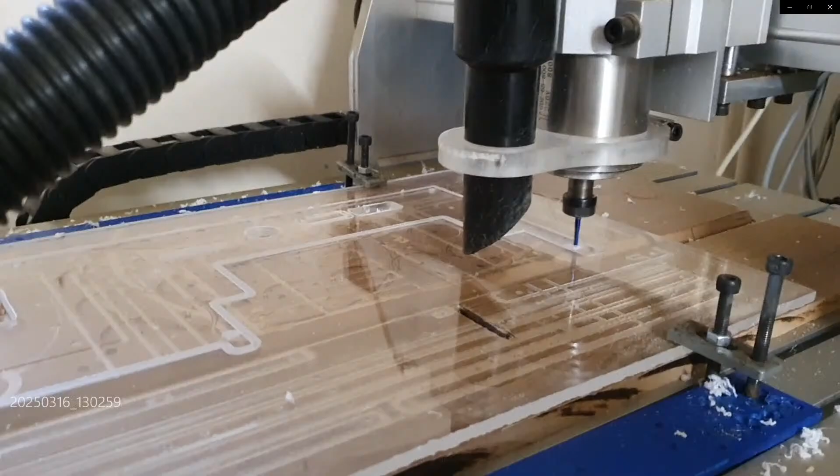Right, I put myself on. So we've got, this is milling out one of the panels. Hope you can hear me over the noise. Maybe you can't, maybe you can. Maybe it's echoing, I don't know. Tell you what, I'll turn down the audio from the display capture if I could do it, but I don't know how to do it. Desktop audio, right, let's turn that off, right, let's mute that.

Not sure it is muting it actually. No, it's not muting it because it's coming out the speaker. So I could mute it on here. Tell you what, let's mute it there. Has that muted it? Maybe, maybe it's still too low. Let's go a bit further.

Yeah, hello, right, anyway, so this thing, I got the plastic already reclaimed, 6mm acrylic, cast acrylic it is. I bought the new milling bits, which is that there, pack of 10. They're supposed to not stick to it. They're still sticking to it.

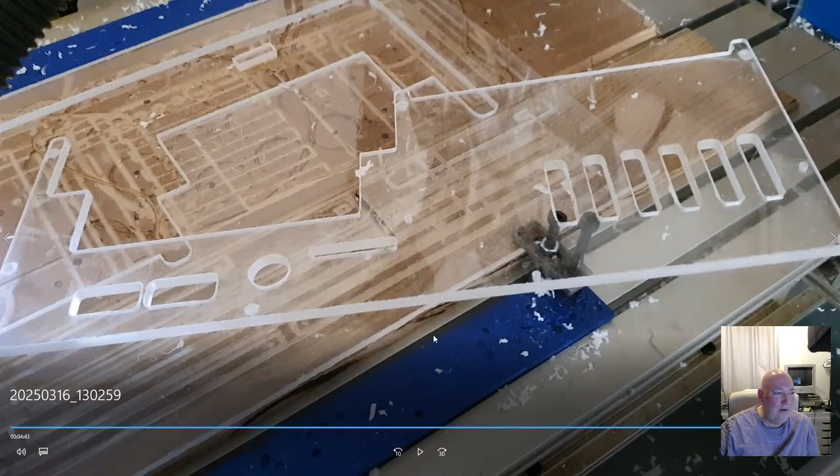Now I have to go around and trim that up, but as you're trimming them, whatever tool you use, you could scratch the surface. So that's one, that's that gone. All right, let's find the next one. Alright, next one.

This is milling out the pockets. They're in the wrong order, these are. So you can see the tip full up of melted plastic. You can't get it off. You have to crack it to get it off, you have to squeeze it. It hardens up quickly. So that's done the pockets on the trim.

Is this the next one? Oh, looks like the same one. Why is that the same one? Anyway, it didn't mill it all the way through. Let's go to the next one. Oh, what is it doing now?

Oh, it's cutting it out. Yeah, sorry, this is the front grille, the air intake. It's milling out going around the outside, an outside cut basically, but look at the state of all this. Look at it, see, it's all hard plastic. It's melted and left it like that.

Now I have to trim that. You can go around it with a blade or something like a wallpaper scraper. And no matter what, you can spend hours trying to do it without scratching it, but you're going to scratch the surface. I've scratched it.

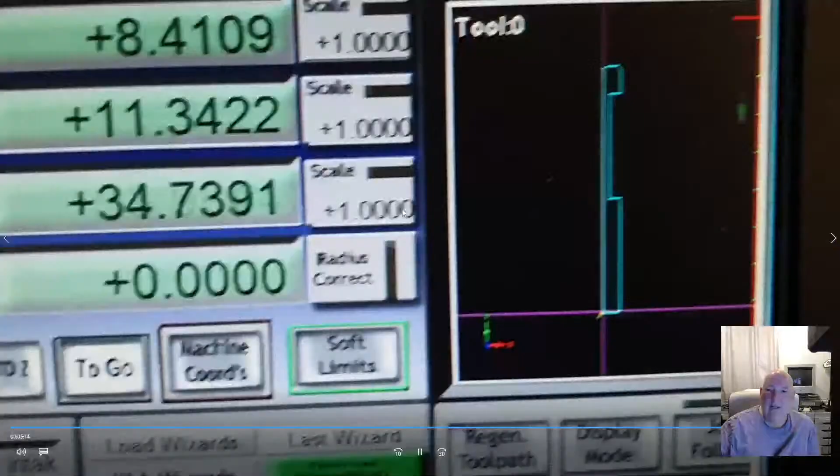It's got a build-up of plastic on the tip, which is not good because, and see, it's almost solid. I think I stopped the thing turning it. That's just a view of that, end of the G code, and it's clogged up.

So I thought if I buy the right milling bit, it would do a better job. It's stuck in because my table's not flat, it's on a bit of wood. It's not flat, the spoil board's not accurate. Yeah, I didn't, it was okay this side, but not the other.

What else we got? Let's have a look. I'll just show you these. Right, this is, don't know what this is. Oh, this is doing the slots. The panel that contains the card slot guides.

It's doing some weird stuff. The G code's doing its thing, and it's done that little bit. It's already stuck on. And it's pocketing out the V. Later on, it'll cut across there and get rid of that rounded bit.

That's its tool path. This would do a better job in aluminium, but it would take longer to cut out. But you'd end up with fine shavings instead of this.

This thing is flinging these pieces out everywhere. They're hitting me, burning my hands. I've got my protective goggles on to stop them going in my eye, but it's chucking them out everywhere. The only reason it chucks it out is when it builds up to such a width, it flings it off. Look, it's just milling with a clogged up bit.

Let's speed it up a bit more. Yeah, it's more of the same, just cutting it out till it finishes. I don't think it's finished there.

That's finished, so I move it out of the way and switch off the inverter that drives the spindle to variable speed. See that brand new bit, all stuck up.

It was a real ball. Look at the mess - you have to hoover all that up, and it's a ball ache just cutting the plastic into these 600 by 400 millimeter, well 300 mil panels, to go on the table.

But there's a finished thing, sort of - the idea is there. But you know, look at all the stuff that's built up on it, I've got to cut that down. The holes turned into a bit of a mess - all the holes swirled round with the stuff that's stuck to the milling bit and melted it.

Right, what else have we got? Oh, this is cutting out some of the... what is it cutting out? I don't know, can't remember now.

Speed it up a bit. Oh, what are these? Oh no, this is doing the front panel - this is doing the floppy bay. This is the double floppy bay on the front panel, and the CD tray and everything.

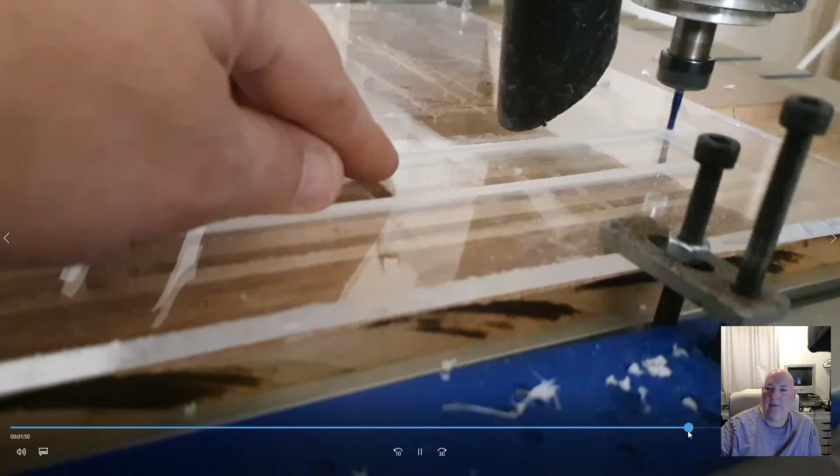Yeah, it's loose now. It's going to cut a bit more G-code because it doesn't know it's cut through it. So I've got to try and move out of the way before it jams my bit. If that gets trapped between the milling bit and the rest of the plastic, it'll break the milling bit off, snap it off. So I have to get it out of the way quick.

So I think that's the end of that, and it's about to go and start the other one, but I've stopped it there because I'm cleaning up the edge. Right, I've cleaned the tip up now, so let it carry on.

I put a feed hole on it, and it starts off nice till it builds up with plastic, it gets worse and worse. I've tried altering the speed. I haven't tried it very low speed because I'm worried about it digging in and snapping it off.

But this cast acrylic melts at such a low temperature. Now I've milled polycarbonate before, and I'll be able to tap it and all sorts. But this was free basically, it was given to me, and I've got a lot of it. But it reacts well to laser cutting, so I think that's the way to go with this particular material.

Every time it goes around, this stuff is building up on the edge and melting into the plastic, so they've got even more work to tidy it up. But anyway, there's a problem here, because I'll show you in a minute, but that is in the wrong place - that piece is in the wrong place, that cutout. Let's just go a bit faster.

There's a bit of aluminium there, because I've milled out aluminium on some of my old videos. Right, next one - this is the last one. No, it's not, that's something else. Not me in my underpants though.

So let's show you the actual thing then. Unfortunately I haven't had a shave, so never mind. What have we got? Let me show you this bit.

And if you look closely, it's horrible - it's all scratched. Hang on, can you see it? Can't see it. It's basically, one side will be fine, you have to trim it with a knife. It's all milky and horrible.

Yes, you can put a hot flame on it and bring it back a bit - might be worth a try, might make it worse. Anyway, it's just turned out horrible, I don't think it does it justice. See all the scratches up here, where I'm trying to get this stuff down. Anyway, it'll be alright for a prototype, just to see what it's like.

So then there was these things, the spacers - milled out the spacers. I haven't touched these, haven't cleaned these up. There's a burr on them, can you see the burr? Horrible burr. Anyway, there's bits sticking out, bits of this stuff. It's so hard I can't get it off - I've just got it off then.

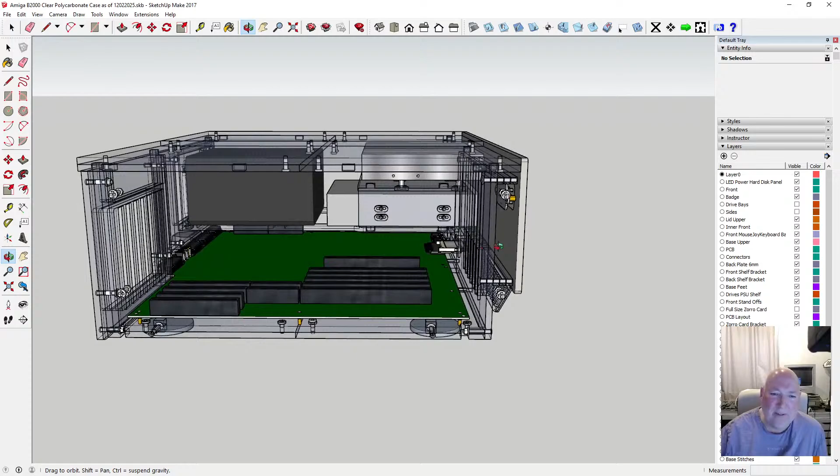I don't want to go and spend a couple of thousand pounds on a bigger machine that can cut this out in one piece. It'd be nice to do it that way, but the problem is having the space for anything bigger - I haven't even got the space for the ones I've got, never mind anything bigger.

So, to that end, with some of this stuff - now the main problem is this bit here. That seems to want to be in one piece, doesn't it? If I remove the front cover...

Let's remove the lid a minute, get rid of the lid, right? And let's get rid of the drive assembly if I can find it. Where are they? Can't see it... yeah, move that.

So if you look at the plastics, we've already got these pieces - hang on, it's probably best to go into this mode to have a look at it. So these three pieces are separate pieces, right, and then you've got this piece. So those four pieces can be made on the K40.

Probably using the K40 Whisperer software - I'll talk about that in a minute. So this rear panel...

It's basically - you could make it in two, couldn't you? You could make it in two. So we'd have to have an extra fixing. We've got four fixings anyway, so we could probably move one over a bit and split this into half.

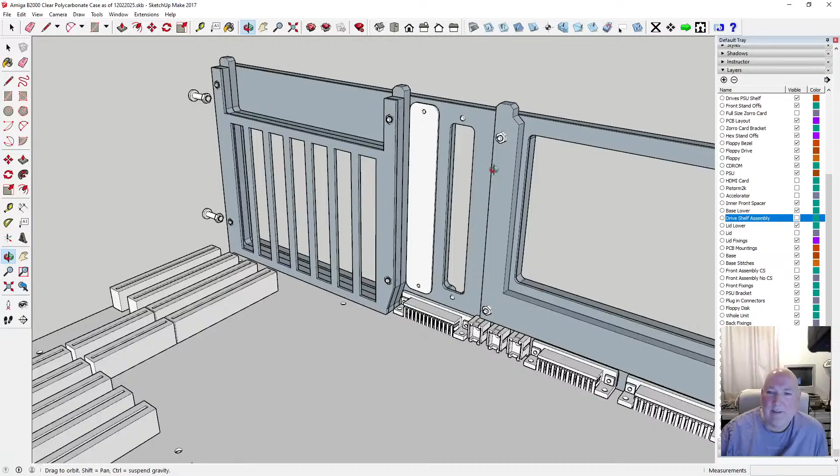This back panel - somehow split it into half. Now where we do that, I don't know. And with a bit of ingenious design on the back plate here, ideally we could extend this bit or do something where it sandwiches the two pieces of the back plate together.

So as you bolt it through, you'll have to have more fixings - that's the only thing. But that acts in two ways: it's a shelf and a bracing plate to brace the back two together to stop it shearing. So that could take care of that, pretty easily.

Now let's have a look at the base plates. Now the base plates, they're already in 4 sections, so we'd have to devise a method for that. It's in 4 sections partly to give you strength - a laminated effect of strength. Let's go back to this other mode for this.

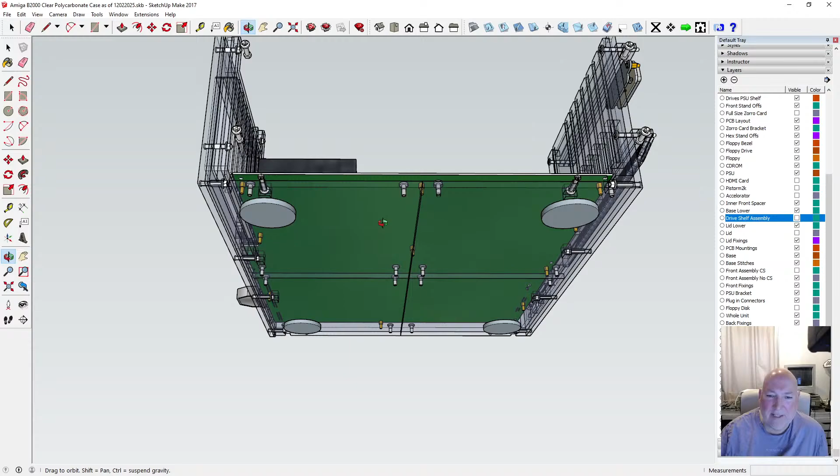So one laps over the other, so when they're bound together it gives you some strength. It's automatically like a bracing action in itself anyway, and it gives a bit of weight to it as well.

So yeah, it's a waste of plastic, and plastic is dear. Really, they just had it for free and I got lots of it. But if you had to buy it again, a sheet, you're looking at very expensive, just to buy the materials - never mind to make anything.

So anyway, I would have to somehow make this - they'd have to be made like that and bind them together somehow. Now, if they're going to be laser cut, it's not easy to do pocketing, so you either cut it all the way through.

I went on ChatGPT and asked, can you laser cut, can you pocket with a laser cutter? It says you can, but you have to alter the power level so you don't cut all the way through. But then you've got multiple passes - it's such a thin beam, 0.1 or 0.2 of a millimeter, you'd have to do so many cuts backward and forward just to get a pocket, and it might leave bits, might not come out flat. Like milling it, you can go along with a fly mill and cut it flat.

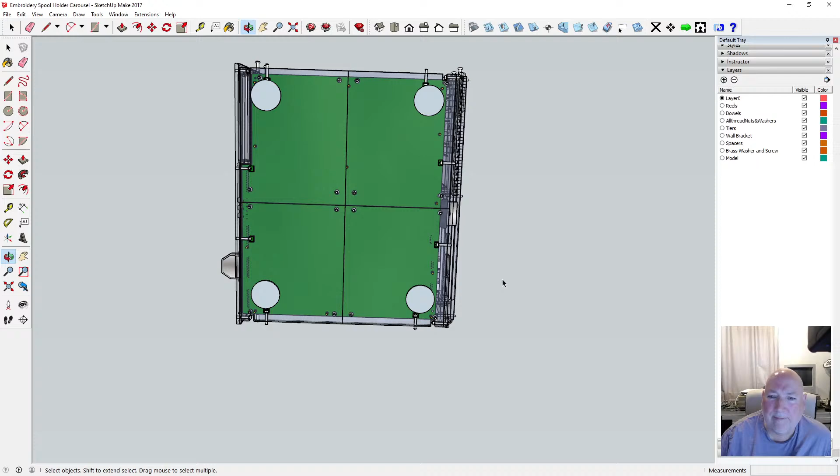Anyway, so we're gonna have to design something. Let me bring up an old design. I was constrained size-wise, not by what could be milled, but by what material I'd got to use - I had narrow strips of material. So let me just find it here... oh, hang on, there it is. I don't know if this is the latest one, but yeah, I made this. This is probably one of the old designs, is it? No, it is the new one.

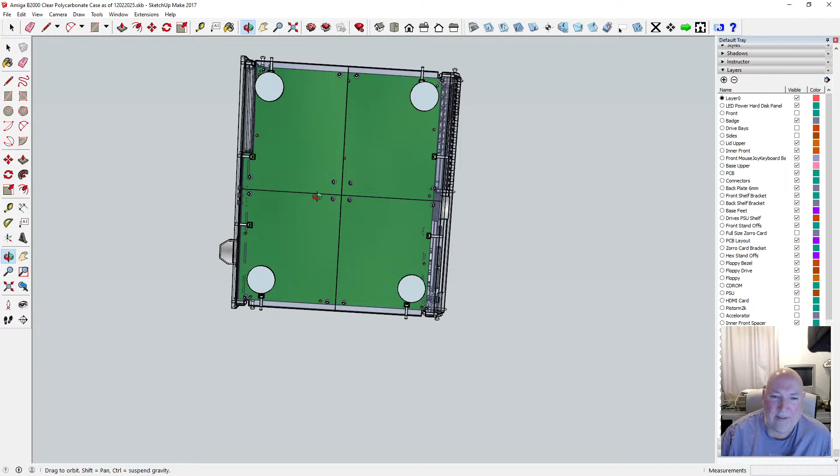So anyway, you can do stuff with it. Now for instance, I'd have to join up - so if I milled out squares, or laser cut squares like this size, for instance, then we could have a square around here that you stitched it together with. But then it's going to look a bit horrible.

Let's hide the PCB a minute. Right, so obviously at the minute we've got two layers - one running that way, and the other two running down that way, and they're bound together with these stitches. They're square, so it doesn't look a problem there.

What I've got to try and work out is how to do it - how to stitch four of them together. So you could put a square in and it could sit under the PCB, then you'd have to have bigger pillars. It's too much compromise, isn't it? It's too much compromise.

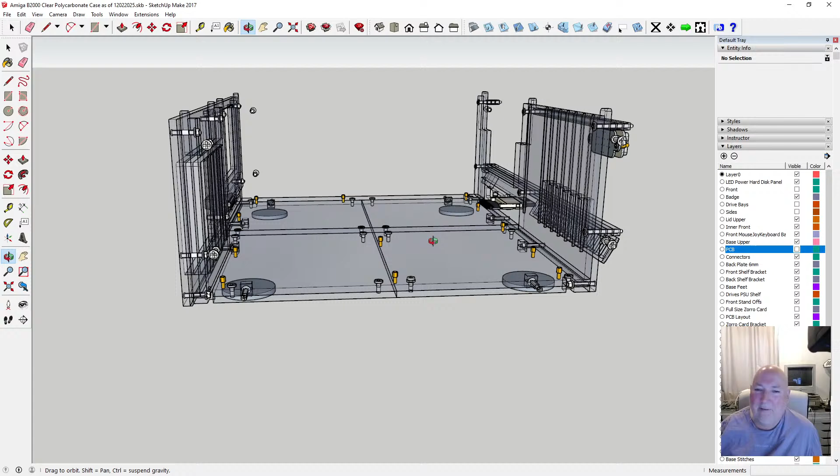So unless... yeah, the funny thing is I never had so much trouble with these when I was using the wrong milling bit. I bought the right one and it's worse. I don't understand it, yeah, it wasn't too bad - I had better results with the wrong bit. So I don't know, it's a weird one. But some people say you've got to get water in a squirty bottle, put it in the fridge, and keep cooling the plastic down. Even put the plastics in a freezer, bring them out cold, so it stops them getting hot enough, so it cuts instead of melts. Don't know, anyway, that's a lot of aggro.

So I think everything's got its pros and cons. The pros are with laser, you haven't got to touch it, and there's no chance of the milling bit hitting it and messing your work up. The cons are you can't do pockets easily, probably, and you've got to somehow, with a smaller size, stitch it up. Anyway, leave the base out of it - whatever we do with the base, we've got to do with the lid as well, so the same thing will happen to the lid.

Now I was thinking, on the top you could stitch it with a round plate, couldn't you, and sit your monitor on a round thing - no, silly idea, but yeah, a bit like a platter. Or you could put the round piece or the stitching bit underneath. But what you don't want to do really is... what you need to do is overlap it. I don't know, unless we do a crossbow type of thing - so you lay the first lot of plastics down, and then we make a strip, mill out a strip that goes across them two. So basically, yeah, you need to tie that up.

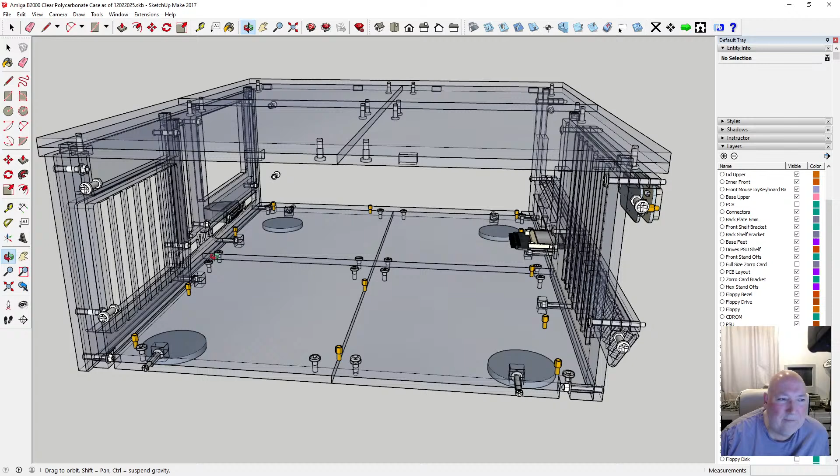So these would be, you'd have to create a flat panel that goes to there, but then you still got to stitch it up in the middle. So you'd have to start off, you'd have to almost do something like this, have a piece you can cut out there like that.

Then you'd have to probably have another bit here like that, and another one over here like that. And then you'd probably have to do another one here like that, and so forth, similar to that. So you'd bolt this, use the same stitches to bolt it together.

And your PCB, obviously might have to use bigger standoffs, maybe, unless your standoffs were on top of these. Yeah, so anyway, we're just running ideas through it, so there might be a way of doing it where it doesn't look too bad.

Or if you're going to stitch them together, so you'd use them and you'd get rid of the extra piece. You'd use a bit less plastic, or we make some aluminium pieces, mill out some aluminium pieces.

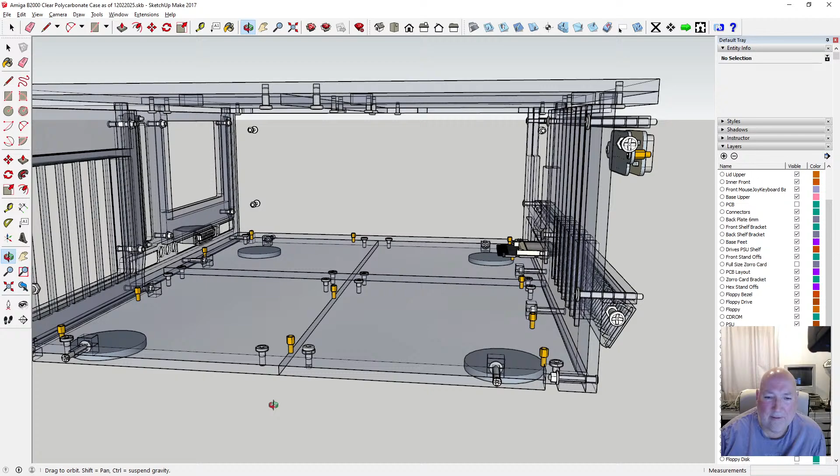Let's go back a few steps, clear that up. Right, so the same thing can be applied to the lid. Okay, now let's take the lid off a minute. Let's have a look at the front now.

So this bit can be done the same way. We could do some of that, we could put an intermediate bit or something here. These turned out too small as well, these did. By the time it was milled, it was just too small. They need to be bigger, really, if we go down that route.

Unless it's too fiddly - maybe it's better to do it a different way, make this in one, fill it out. I don't know. It's one thing designing it, it's another thing actually building it. So anyway, this piece could be cut there in the middle, so that can be made in two parts.

Almost, you almost want it like a zigzag, you want an overlap, but like I say, you can't overlap easily. So to that end, how do we join the two pieces? We'll have to work out how we're going to somehow - it needs to plug together somehow.

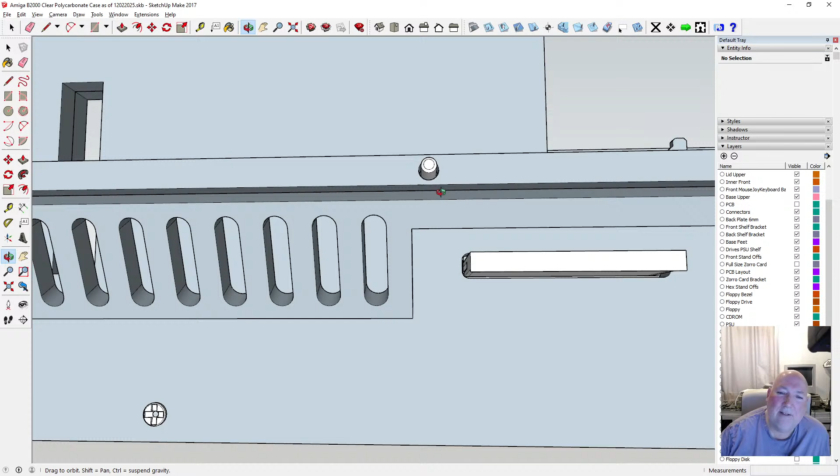Unless you could do it like a jigsaw, I suppose. You could put like a mortise and tenon joint, or a jigsaw, and then you just superglue it, but then it would look horrible. Yeah, so we've got to work that out.

Right, so that's one little bit of trim, but then we've got to work out also. So on the front, we've got this - there's no, actually these both pieces are in one piece, aren't they? But it wouldn't take much to... hang on, I've lost it now. Where's it gone? The back panel's on.

So that could be one piece, and this could be another. But then you've got to join them together somehow. So you could join it from this side, perhaps.

Well, because I've got two the same here almost, you could have one - now they occupy the same space, aren't they? Yeah. So they're held with that pin together there. Right, they're held with that pin. I'll do it from this one. So they're held with a pin together.

So these cross members could... oh, we have to cut them in bits as well. So it's a bit of an awkward one, how we do it.

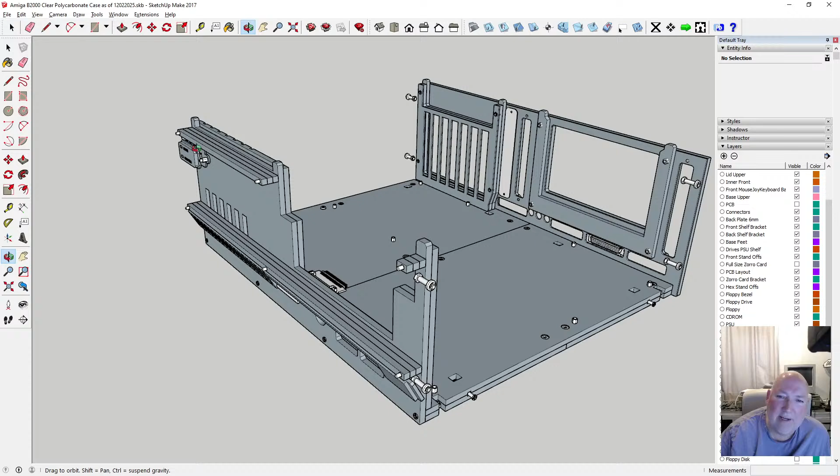So I want to keep the design together like this. As soon as you save one design and leave it and go to another, it's almost unusable, because the first one will be unusable. Because any additions or changes you make to the new one, you've got to go then apply it to the old one, or if you don't, it'll be out of sync. And really, you'll never touch that one again anyway, so you might as well get rid of it or modify the new one.

But I do want to design this out of aluminium as well, to make a new one out of thin aluminium, very thin aluminium. I found a piece of aluminium today at our works, and I took a picture of the label, and it'd probably be okay. It's still got that there, look. It's not the motherboard, is it? That's alright, okay.

That's the compact flash. So basically cutting it apart is not the problem, it's putting it back together. So making the separate parts, somehow you've got to stitch it, and it's got to be strong enough to be able to be moved around.

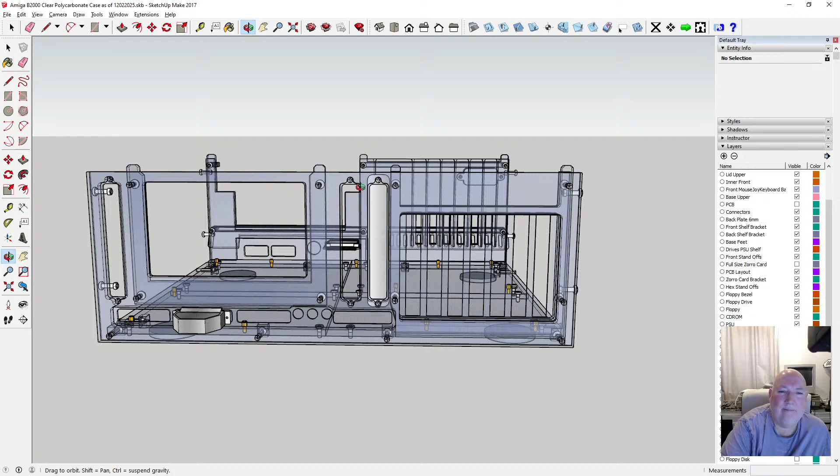It's just a shame that it's so big. You know, if you did a smaller computer it would be much easier, but if it was half the size. It's sort of damned if you do, damned if you don't. Stuck.

I suppose, what about 3D printing the whole thing out? Use a lot of plastic, wouldn't it? But 3D print each section. I've got a 3D printer, I've never set it up, it's just a cheap one. So you'd use a lot of PLA, but you wouldn't have the mess - it'd just take you literally hours to do the business.

I just want to, how am I going to do it, I wonder. Design in sections, or lay out money for a bigger CNC laser. The problem is, we want other people to be able to make it, so not everyone's got a big laser, not everyone's got a laser at all. So, I don't know.

See, you can make certain parts - these three here you can make. Because we're going to build this up out of bits like this, stitched together, that was the whole idea. So I'm just trying to work out if there's an ingenious way of doing it.

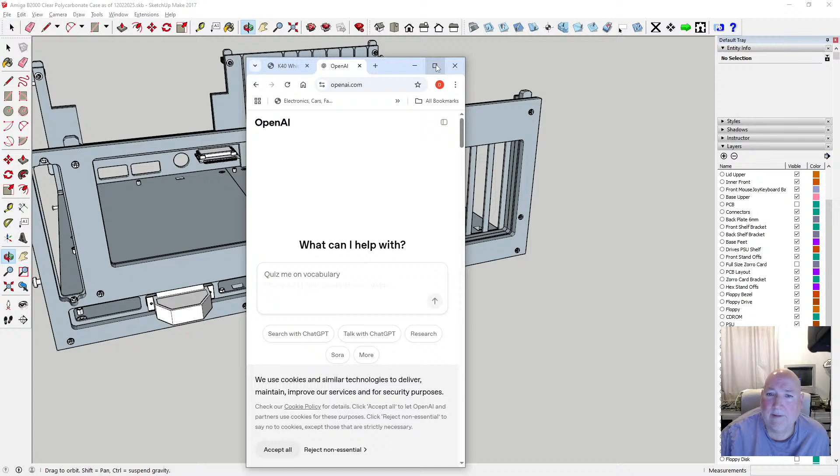I have a SketchUp model of an Amiga 2000 case. I use SketchUp's PhlatScript to generate the G-code for my CNC 6040 router.

I want to use a Chinese K40 laser engraver instead, but I will have to cut up the panels into smaller parts, i.e. a 500mm by 200mm panel into two 250 by 200 panels, in order to get them to fit the K40 usable laser area.

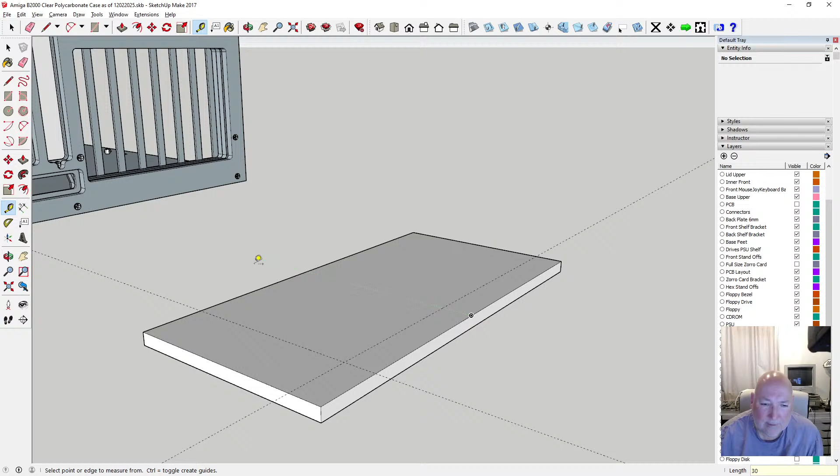I'll tell you what, let's go more than 15 mil. Let's go 25 millimeter or 30 millimeter. Let's do 30 millimeter. So we'll go like this, 30 millimeter, 30 millimeter. Okay, so we've got 30 millimeter.

So what we want, I need to look at this from above really, and probably in parallel projection. Alright, so we're a little bit off center. Let's just do a design.

So we don't want to do that, so tell you what we'll do, we'll make another line here, another 15 millimeter. Alright, and possibly one more. Let's do another one. Right, so that's our center line there. So I'll put a line across there.

Okay, so we need to generate a dovetail. So this one section, well, we'll say that's a section. We want to start from and work out. So we need it to cut. We need this piece to lock into that piece, and that piece to lock into this piece.

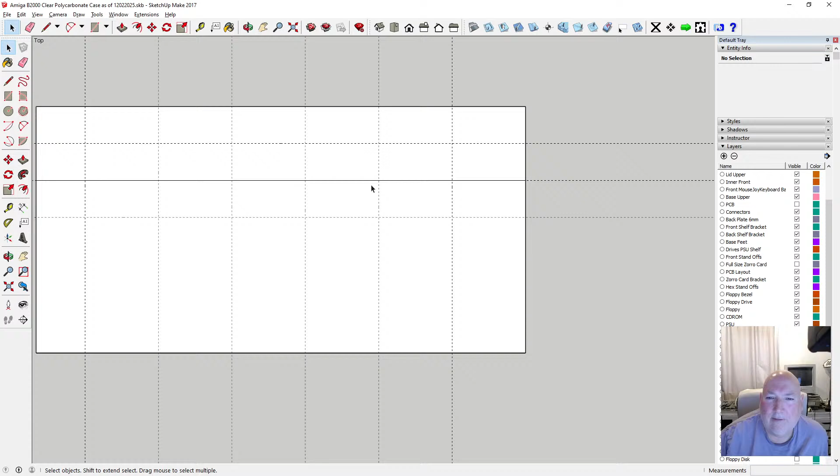So we'd start from somewhere. Let's just pretend. Let's just draw something like this. See what happens. Okay, so what we want is another line in between. Let's put another line. I think we need another 2 lines, don't we? So that's 30 mil, so 15. So let's do 10 mil and 10 mil. Okay, let's try that.

Let's have a look. So we want to come. It's got to go into that bit, hasn't it? So they're going to have to be jointed. So right, so we're going to start.

So let's say it's difficult. Yeah, let's say we go to there, and there to there, like that. And this piece, how do you do that? Let's just go from there. We've already got that there.

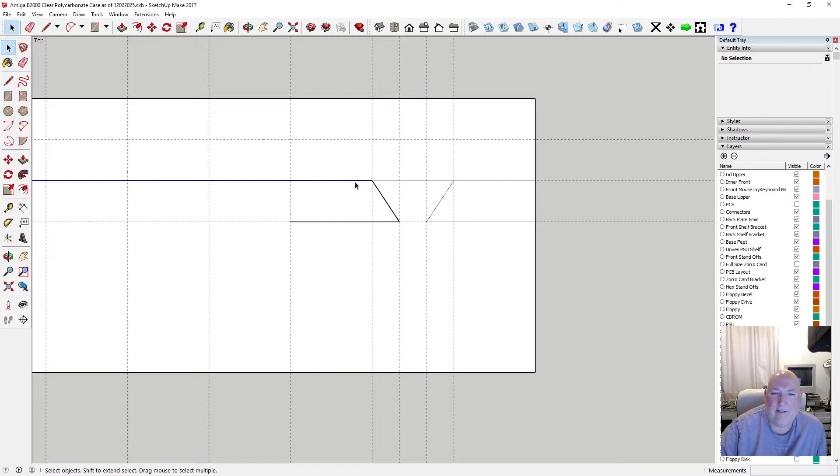So we need to get rid of the line a minute. Like that. Then we need the same thing this side, so we need another 10mm there. And so let's say another 10mm this way.

Then we need that would have to be sort of like that, for instance. That would be like that. Don't know. So that's part of that plastic sits into this, and this one sits into that. That's it.

Okay, so then we go. What size is that? 30mm. So draw a line out this way, 30mm. Then we go up like that. It's not easy to do that, so let's put some more lines in it.

We don't know what size that is, do we? Hang on. 10mm, so go 10mm. Draw a line here up to there. That's it, so then it's more of the same.

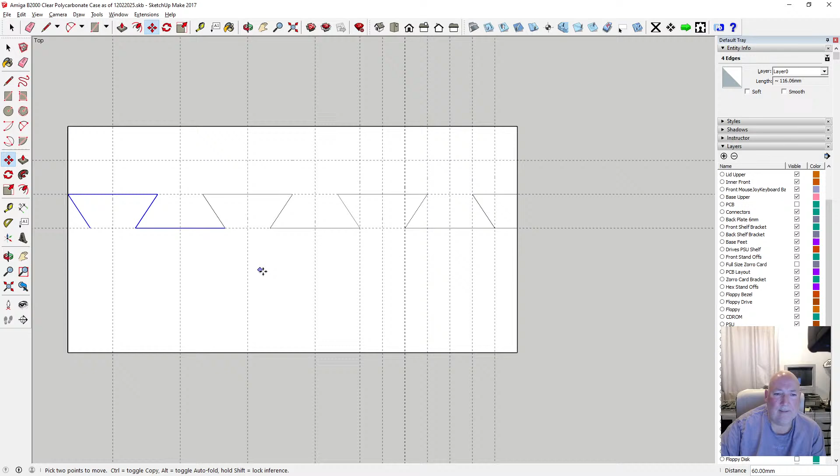So we get rid of that and that. So we've got this piece here. It should be able to copy those and move it over to there, and again copy it over to there.

Let's get rid of some of this stuff now. Whoops, wrong one. Is it long enough to meet each other? Right, so that doesn't belong there. Let's just, yeah, so that needs to then go like that.

So we've got this piece, so that's part of this. It's quite angled, so. But you've got to have the same angle, otherwise it won't fit in.

So you'd have 2 bits. Let's make this into 2 bits then. Right, let's make that into 2 bits. Cut. No, just got rid of it all. Undo cut.

Right, so how are we going to make this into 2 bits? So copy it like that. Copy. Why did it copy that bit? No. That's weird, isn't it? So we copy it.

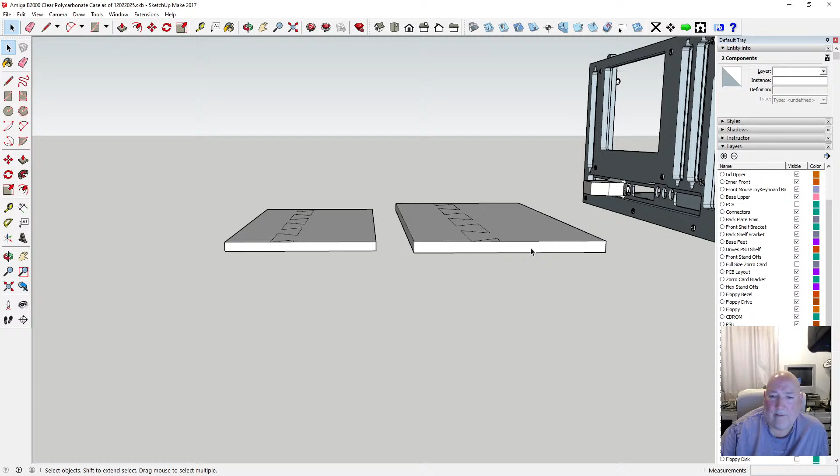Create a component. Let's get rid of one of these. Let's get rid of this one a minute. Oh, getting rid of the blooming. Gotta be careful I don't select the other drawing. Oh dear, I can't get to it.

Can't get to it in this mode. Right, let's get rid of that. Right, let's get rid of this bit. Extrude it down to nothing. That's it, extrude that down to nothing. That's it.

Okay, so you've got this weird looking thing. Let's make it into a component. Great, so we'll copy it. We'll spin it round. And we'll drag it over here.

Let's zoom into this a minute. Let's put it up at the same height. Let's just connect it to there like that. So we've joined 2 together. We've joined 2 together and it's a push fit.

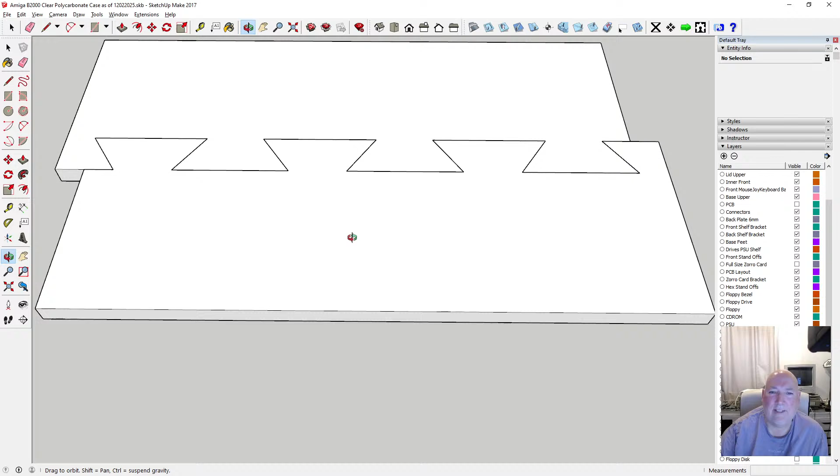And it's laser cut, not CNC'd. Not CNC milled, it's laser cut. So they're going to be accurate. And it'll allow... maybe it's going to be too tight a fit. But we could mill that out with a bit of plastic. I could put it in my CNC, a single piece.

And the good thing is, when you CNC it, the bit that's left over can be used, but you can only get one at a time. So, right, okay, so I like the idea of that. Let me just ask ChatGPT something.

One more thing. Dovetailing acrylic, 6mm, 2 panels together. Is there an angle and spacing that is preferred?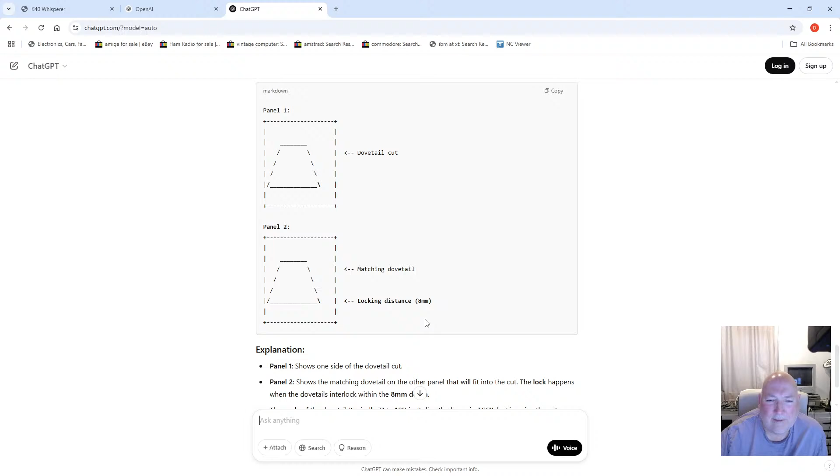Can you show them, two pieces of material connected with three dovetails each?

What the hell is this? They're all the same. What's the left side? Oh, hang on, there's more. That's all the same, isn't it?

I need to see them interlocking.

Oh, that's not interlocking. No, it's not working. When interlocking, there's nothing happening. It's all the same stuff.

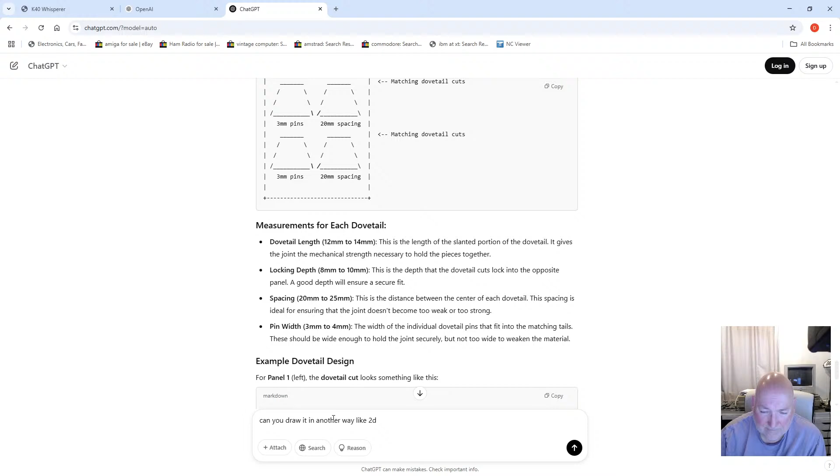What the hell is it doing now? It's confused, isn't it? It doesn't know what I'm talking about.

Just show the two pieces locked together.

2D view - it's just going round in circles. It can do this sometimes, and it's probably because I've exceeded my allotment, so it's using the old ChatGPT now. Get smart responses, upload files and images and more. What? Right, okay. Log in, sign up, don't know. Yeah, it's not good. Right, let's try and work it out.

It's not going to tell me the thing I want to know. Pin width 3mm - the vertical width of the dovetail pin that fits into the tail of the other panel; each pin is 3mm wide. Dovetail length - the length of the angled portion of the dovetail; a slanted cut extends 12mm down from the top of the panel. 20mm spacing between the center of each dovetail pair. Locking depth - this is the depth of the interlocking portion if it's not explicitly shown.

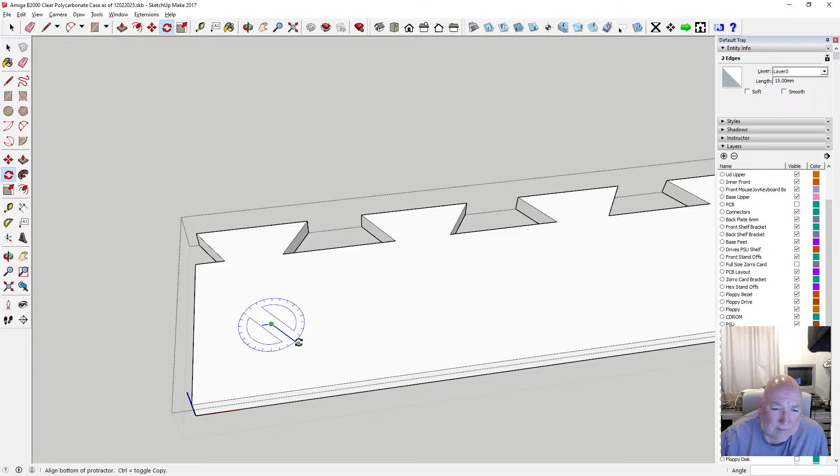12 - what angle though, 7 degrees? Did it say 7 degrees? 7 degrees. Oh, is it - it's moved the whole thing, hasn't it? I didn't tell it to rotate that.

Seven degrees. Okay, so that's 7. Then what was the other one? 12mm spacing. 12mm, then 20mm spacing. Okay, 20mm spacing.

Oh, what's it done that for? My fault. 20mm spacing. Then we want something like that again.

Flip it. Flip along the red direction. Right, so that's a lot, isn't it?

33 mil. 20 mil. Oh, I'm confused. Isn't that what I've got already?

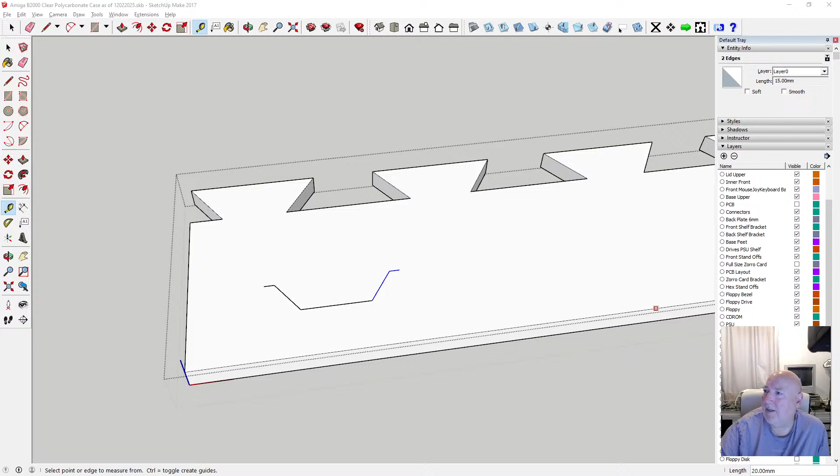Right, I'll tell you what I'll do. I'll take this off screen a minute so I can follow it while I'm working. Let's leave that alone a minute. Right, let's create 2 panels, 100 by 100. 2 rectangles, 100 by 100 panels. Create.

Select the push pull, extrude the first panel to the thickness of 6 mil. Yeah. Okay, so we've got 2 of them.

Use a rectangle to draw a dovetail slot on the edge of panel 1. The slot should be angled. You can use 7 degrees to 10 degree angle to cut the dovetail slot.

Right. Use the rectangle tool. Draw a dovetail slot on the edge of the panel 1. The slot should be angled. Right, draw a slot. It's crazy. Where do you start from? Left panel. Oh god, it's crazy, man.

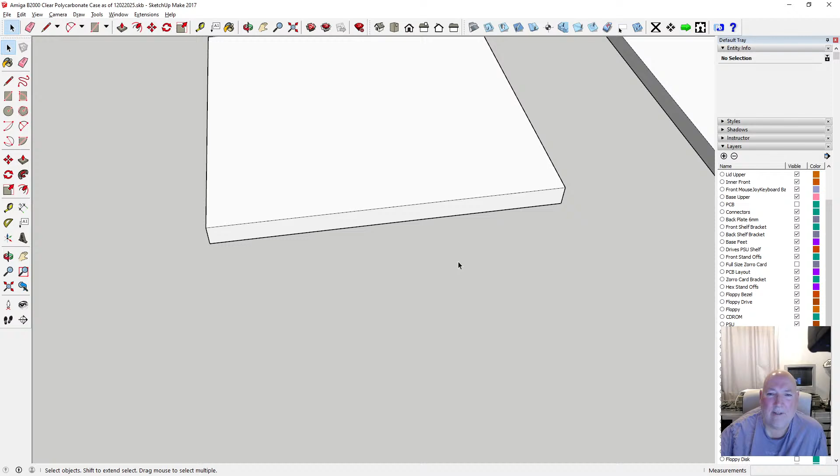Okay, so we're just gonna have to make our own. We've tried to get some help, but we're not getting any help, so we're gonna have to just forget that idea and create it ourselves. I don't like the angles, they're a bit too pointy, so we'll have to alter them. Let's alter the angles.

Let's just grab this one and move the whole thing. Move the whole thing this way, 5mm. And grab the whole thing here. Now they probably won't interlock properly. 5mm.

Okay, and they're too long as well, a bit too long, so let's sort them out. Too long, 15mm too long. So I'm not sure I could push that in there, can it? No, can't be pushed, it can be pulled out. So I've got to do it a different way.

Let's just make them - oops, wrong one - let's make them 6mm, as in the 6mm plastic. Right, let's just do this then.

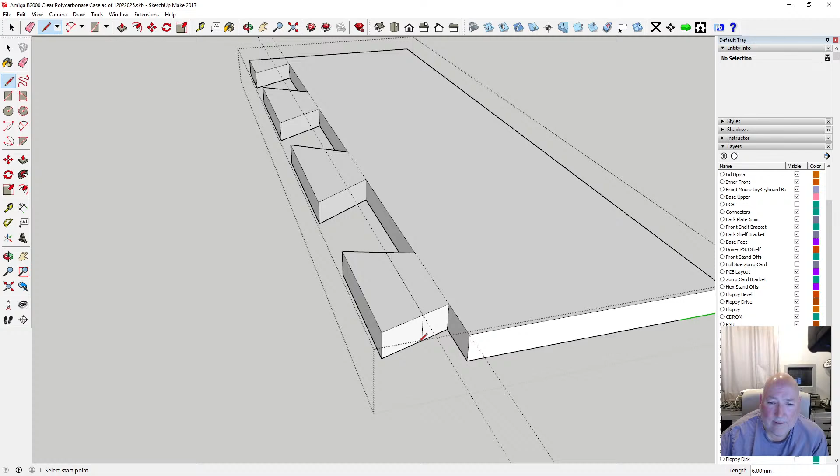We don't need to do all that, do we? No. So what I'm going to do is flatten it out. Oh no, we can't flatten it now, can you? Right, we'll carry on the way we are. Right, let's just do it. Create one of them at least.

Okay, just lose this. Okay, so we've got this little bit of... let's get rid of these lines. Look at it in this mode from above. That's better, isn't it? Better, loses less material. There's less to snap off.

Okay, so we want what size have we got here? Let's have a look. 24. Let's have them 20mm.

So 20mm. Let's have another one. We want to go from here. So it's 20mm. We want at least another 20mm space, so go 40mm.

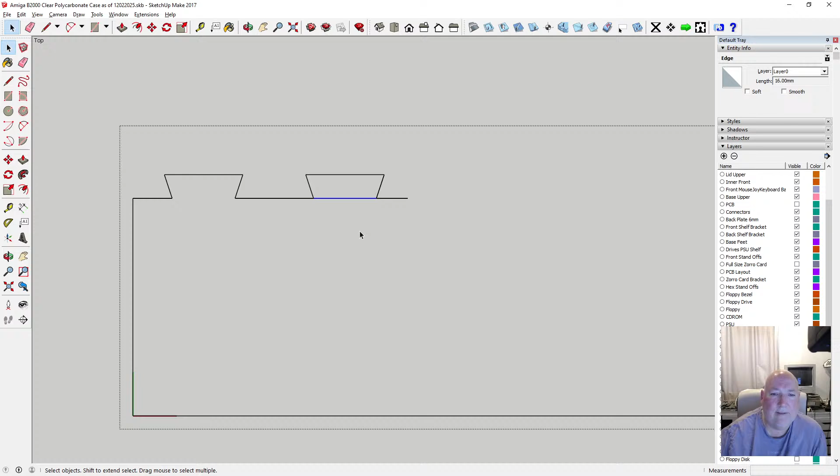Right, so we've got equal spacing, so that should be the same. So that is what? 16mm. What we got here? 16mm and 20mm, 20mm. We've got 6 point something, but 6mm. That's what we'll have then, that's what we'll do.

I'll just reproduce this now. So we'll start from this length here. Copy that out to there. Copy that out to there. Copy that out to there. And copy that out to there. And we'll stop it there.

And we'll put a piece in there. Don't want the filler, the paint. Right, so we've got that there. We've got some weird extrusion going on, so we'll just copy the, delete all this.

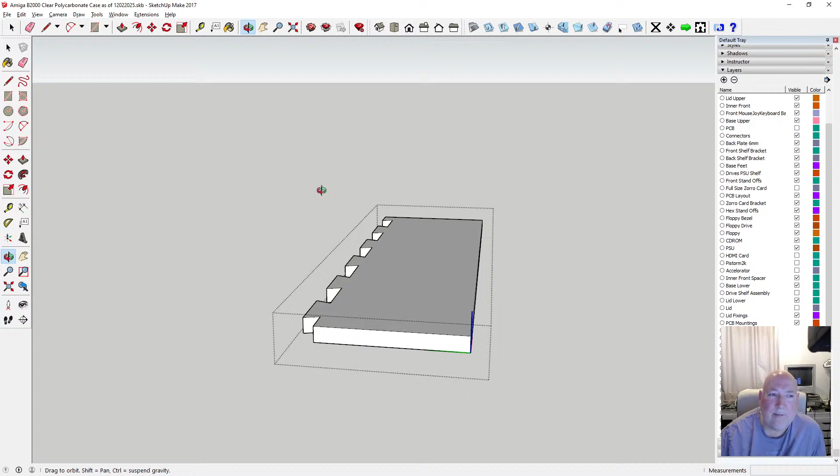Okay, and we'll just redo it. 6mm. Okay, so we've got that there. There's our piece. Get rid of this one and duplicate that one and spin it round.

Oh, keep getting the bucket. Right, I'll try and lock it in position by dragging it from there to there, just like that. Okay, something doesn't look right, unless it's just the way I got it selected. It is, isn't it? Just the way I got it selected.

And you could flip that over the other way, then it won't not fit. Doesn't matter, anyway. So we'll have to implement that across the stitching.

So we're going to put the two panels together, so you could basically make these bigger, say 300, 300s. Right, okay, so we've got

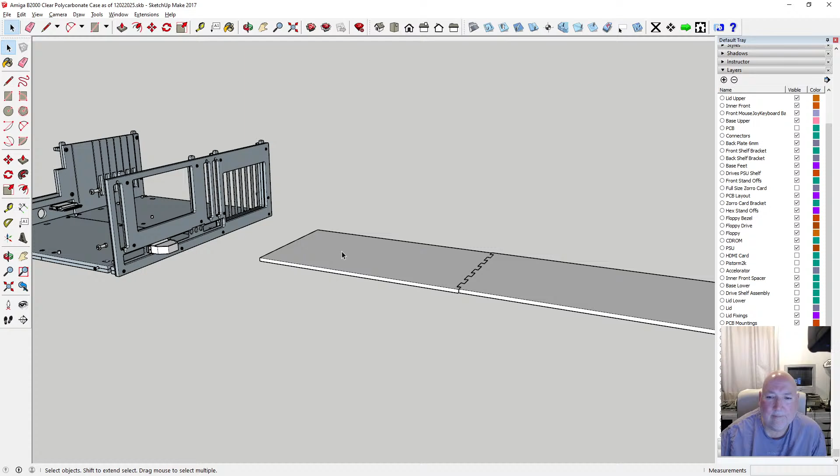Let's just colour them so see what they look like. Where's it gone?

Right, and there's this bit here, it's no good. Need to see what it looks like.

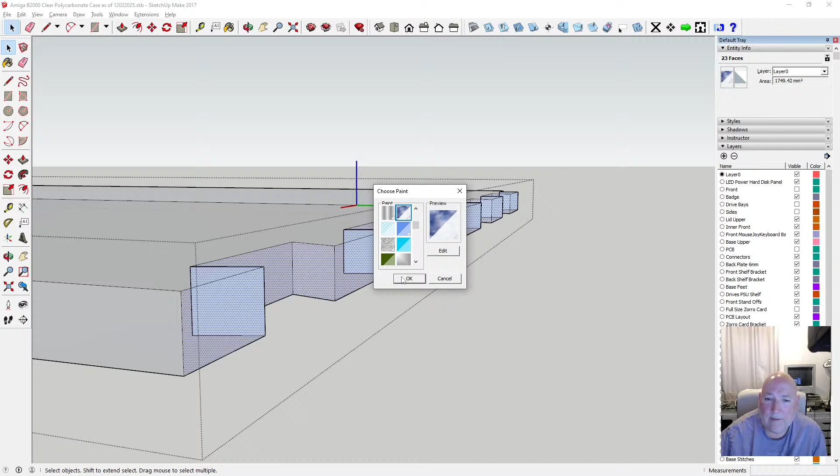Okay, so I've got them joining up. This is the same material, so you've got two big panels. There's a stitch in there. What are we looking at? Hang on, X-ray, same thing.

Let's turn it on its side. And the other way around.

Put it somewhere like... I can make big pieces out of this.

So you've got a weird stitch going on, dead ugly, but it's alright for the base and the lid maybe. You only got two pieces together. We need to make 4 pieces together probably to do this area.

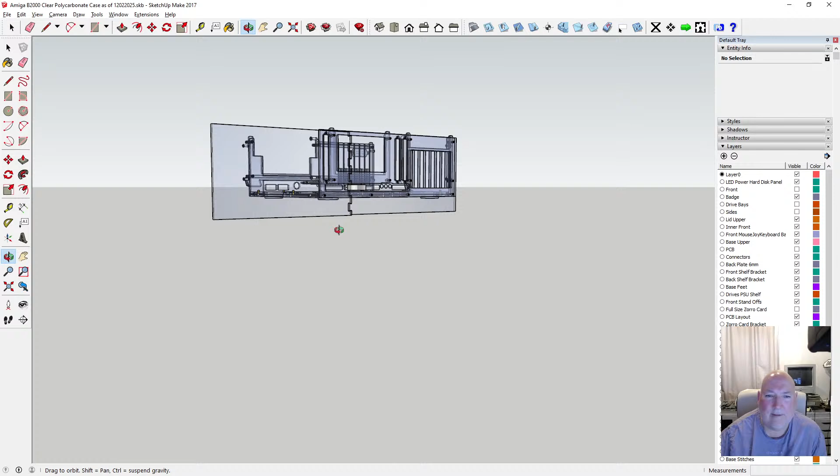So to that end, let's just move this over here a minute. Right, okay, so what we've got to do is go into the edge.

That's not right, that's better. So we'll just, what we want is to copy this here. Actually, copy all that there. How are we going to do this? So we need a template to copy that to an edge.

So what I'll have to do... Oh, I've lost it now. I have to flatten it first, probably. Flatten it back again, I don't know if I'm upside down or what. If I flatten it now, I'm going to have nothing left to work with.

So what I've got to do is find the edge on, like that. And just go into it. Grab everything but... I'll tell you what, delete. See if I can do it this way.

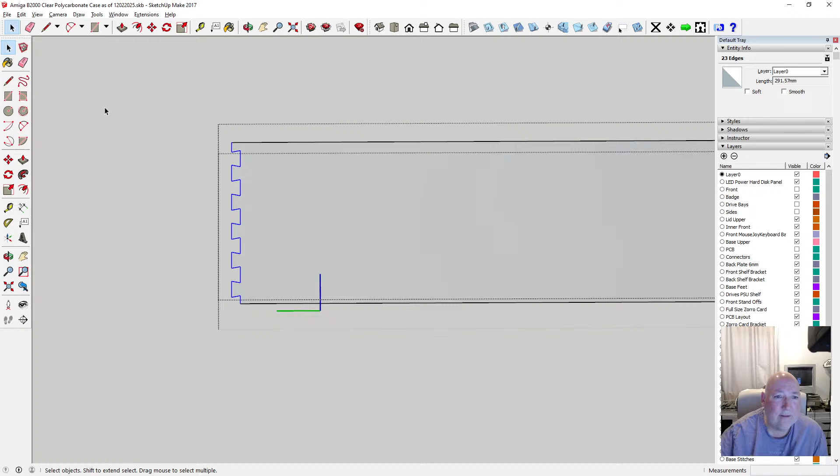Right, so hang on, copy it, come out, paste it in place, rotate it. I need to rotate it round this angle. So I don't know where to grab it from. Let's try the middle.

Oh, that's not going to be any good. We need to move it out the way. Oh no, it's on the surface, that's fine. We need to move it somewhere like this. Needs to be in there though, so it needs to be done from there.

So I need to cut it, paste it in place. Right, what have we got here? Is it okay? Just got a thin piece at the minute.

Ah, we still haven't pasted it. We're not in the model yet. There we are, paste in place. That's it, so get rid of.

Right, we need to move that over there. So that needs to stay there. So it needs to finish on one of these. So I need to push that out to there. Sort of.

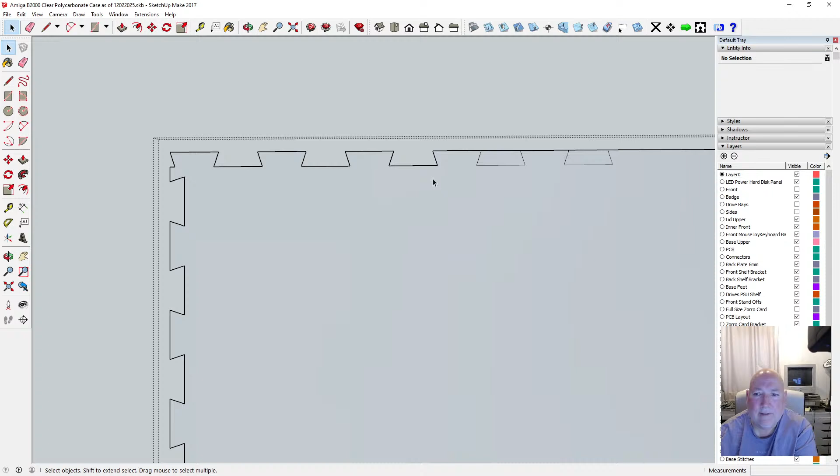Okay, there's a bit of a weirdness going on there, but hang on. We'll have to come up with a design that works. No, wrong one. Right, okay.

Suppose we could copy that out. Start from there, so we want same again.

Have one more. How do we get that? God knows, there's more to this dovetailing than meets the eye, isn't there? So that doesn't look right there. We can't have a dovetail on the edge like that.

So we need to sort that out, move that over to an amount, 12 mil. No, oh yeah, I could do that, 12 mil. I'll just correct this after.

Right, so we've got that there, we've got a line. We need to keep the corners intact, which means we need to spread that over. Yeah, that's right, we need to bring that back, bring that back to there, get rid of this bit.

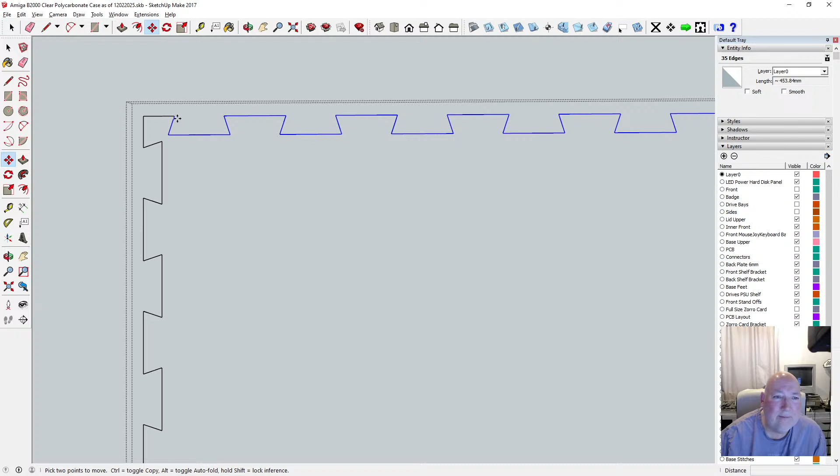So we need to start 20 mil, so we basically need to go back out to 20 mil and then bring this down by 10 mil. That's better, so nothing's going to snap off now. So that's what we want, and we've got ourselves a corner, and we've got 20 mil and 20 mil. That's probably best.

Okay, and the problem is we'll end up with weird sizes, so one of these where it joins might have to be a weird size to make up for that. Let's copy this over to here. Right, so we've got weird stuff going on here. Okay, so yeah, one of them's got to join in there. We basically got to make it like a Lego, so each part joins up to the next part. There will have to be some compromise based on the size.

So that's weird there, so right, what size have I got here? I don't know, can't remember what I did. 200 mil. And what have we got this way? 361 mil. That's too wide anyway. So what we want is to do it at 300 mil.

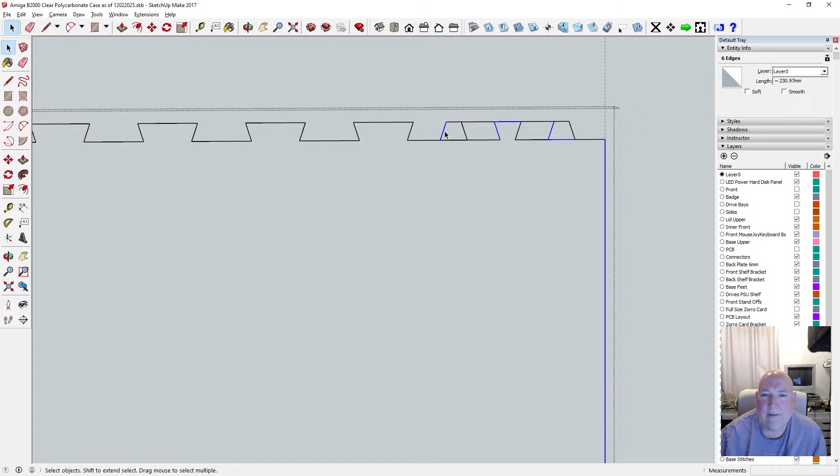No, what didn't I do? Hang on. So that's there, so... Anyway, that'll do for testing.

So we can get rid of... oh, that's already a component of this one. Oh god, I've been drawing this upside down all this time.

Let's bring it out and join it up. So we can join it that way.

Now, problem is these aren't... I've got no surface, so I need to make a surface. That's the surface, I need to... oh, will it let me twizzle it round? 6 mil, there we go.

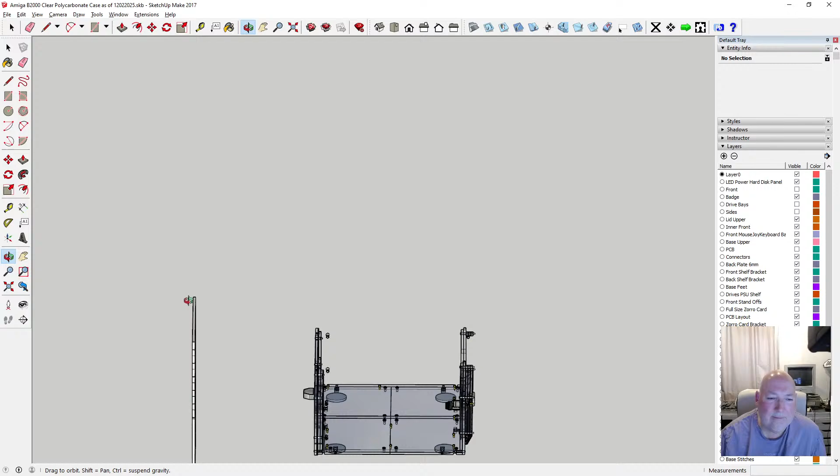I lost all the colours again now, and I've got weird stuff going on here. Right, I'll make sure I haven't deleted my model. Sides. Yeah, looks all there. Front.

Let's put everything back on so we don't lose everything. It's easy to lose stuff, especially when you're trying to model within another model.

Right, where's the lid? Where's all this stuff gone? Full size Zorro slots, okay, is that the lot? And what we haven't got is a compact flash card sat on the top. We said we were going to get one on the top.

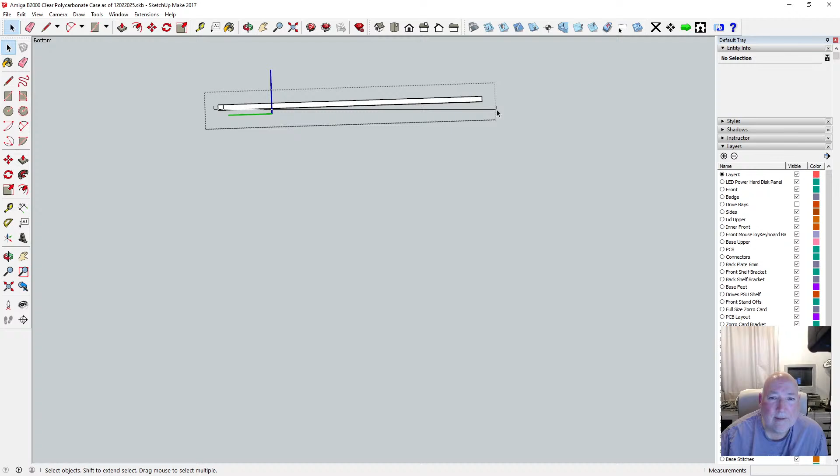Oh god, here we go. Oops, what am I looking at? Yeah, we could do it that way.

Alright, so delete that, and then colour it the colour after, and the other side.

Okay, and then come out of that, or extrude it 6mm, that's it. Saves going around the whole thing all over again. Shortcut. Right, so we've got our panels locked together. What we want is another one.

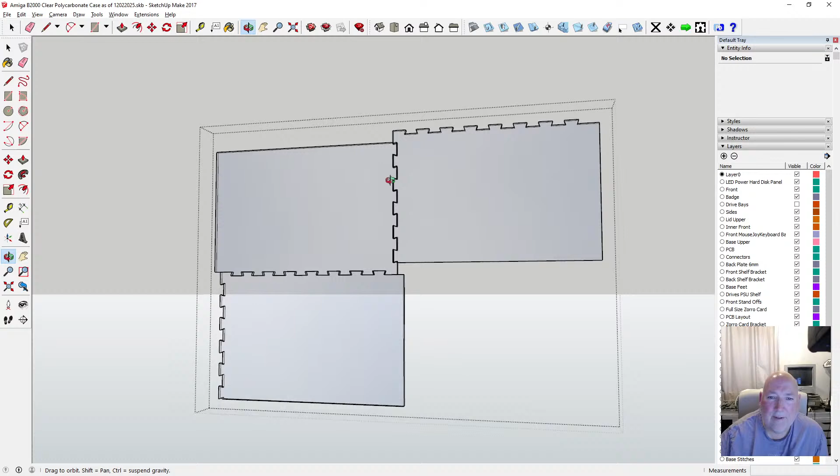Something like this. So we could lock them together and then apply some kind of glue, acrylic glue, so we could build our panels up like that, or don't glue them, just hopefully they fit together with such a tight fit that they don't move, maybe.

Anyway, so I'll keep one of these as an example. That's 6mm, so got from there to there 6mm, which is the same thickness as it.

Right, let's bring it back up to the right way around. So we could stitch these together then. We'd have to stitch these two panels together here because they get them in the laser. Stitch these four together. Stitch the bottom together.

But if we did stitch it together, now we'd still need 4 lots though. So we still need to make a base because we've got to attach the sides to it. The sides have got to be attached to it as well. Unless we dovetail the sides to it.

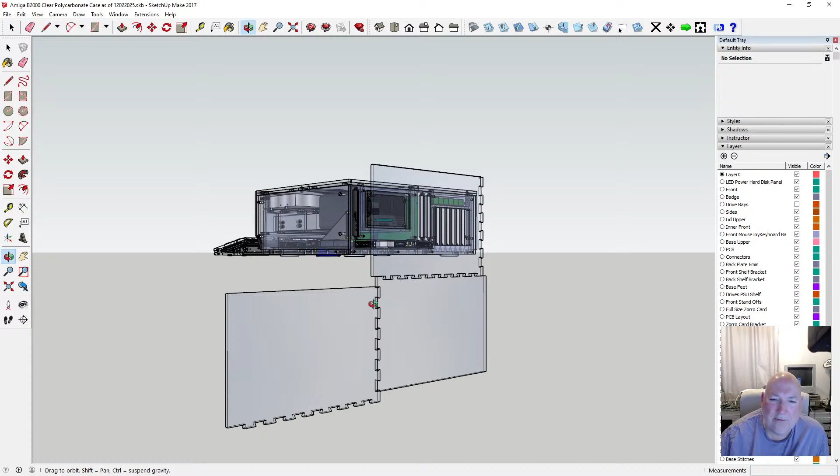Can you dovetail an angle that way and upright? I'm not sure if you can. No, how to do an angle. Well, they do it on drawers, don't they? They do it on drawers. I need to learn some old skills.

Let's just go back into this mode a minute. So if we get a piece of this, for instance, copy it. We need to turn it on its side. Like that. And grab it down here and shove it over there.

Right, what have we got going on here now? Totally at odds with each other, look. So you could do it if they weren't dovetailed like that. So how the hell would you do that then? How do they do them on a drawer?

Not sure, let's find out. Drawer dovetails. Right. Okay, so one's angled one way, so oh, I see. I see. It's a very clever design, isn't it?

It's got to be straight cut, so you can't have that kind of thing with a laser. So to that end, I could join the ends up, but I'd have to have straight fitting ones. Straight fitting, so we'd have to create some straight fitting edges. Just have straight and the fingers would sit together, but then you could still glue them if they were tight fit, but then how would you lock them in?

Going back to my other idea, well, the case idea where they fit inside there, the bits stick up inside a hole with a bit of clearance. Here, so it allows you, they're not that big, but they're not spaced. That's only for the lid.

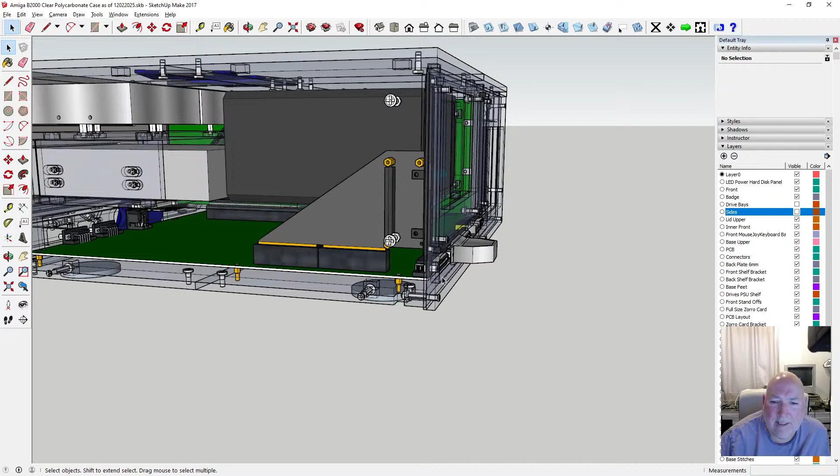Do the same idea for this bit here. Same idea on this bit for dropping these together, so the back could fit into the base. So you could use that idea down here on the back. You could have to bring the base out and then dovetail that to slot in.

And we've got these. Actually, if we did that, we could get rid of these fixings and one of the layers of plastic. But then, would it be strong enough? I suppose if it was acrylic cemented, glued. I've got to make sure it doesn't burn the plastic. It's special cement for acrylic, I suppose. But he said ChatGPT said it does melt it. That's how it glues it.

So, anyway, it's almost entirely redesigned. Right, so yes, you can join panels like this. So let's just get rid of these a minute. What time we got now? 2.5 hours, right? So we've explored a few ideas.

So we got all the sizes now. We got all the dimensions, which take time. So we've got all that capability.

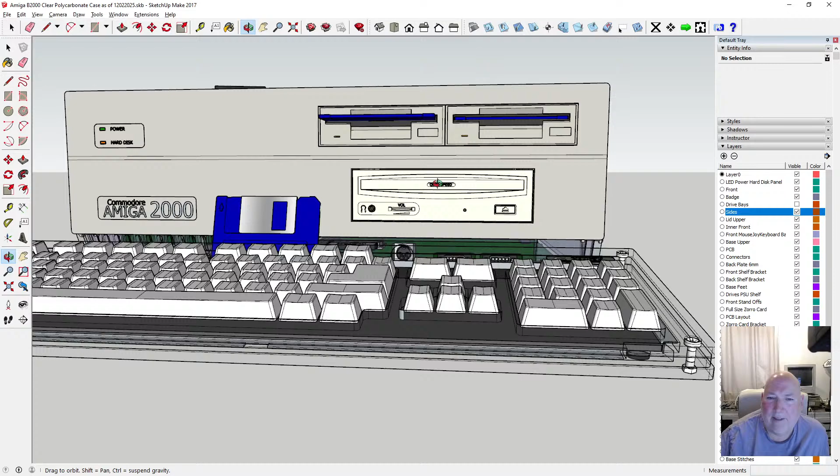Now there is a problem with this CD-ROM. I milled it out in a weird way. Now it looks alright there. Now this piece, when I look at it from there, it's offset slightly. And come to think of it, now it does look offset. So when I hold it up against the real one, just hold this up against the real panel. Let's have a look.

It's wider. That's sort of centre on the floppies, but then we're out by about 5mm. The indicator panel's fine, but we're over by 5mm. Yeah, we seem to be 5mm out, possibly more. We're definitely 5mm out, and it doesn't look centre. It looks narrower there than it does there.

So even on the drawing, let's just measure this. If we go from here down to there - hang on, I need to go that way, sorry, I need to go that way. 27.25. And we've got here 32.25. So we're about 5mm out.

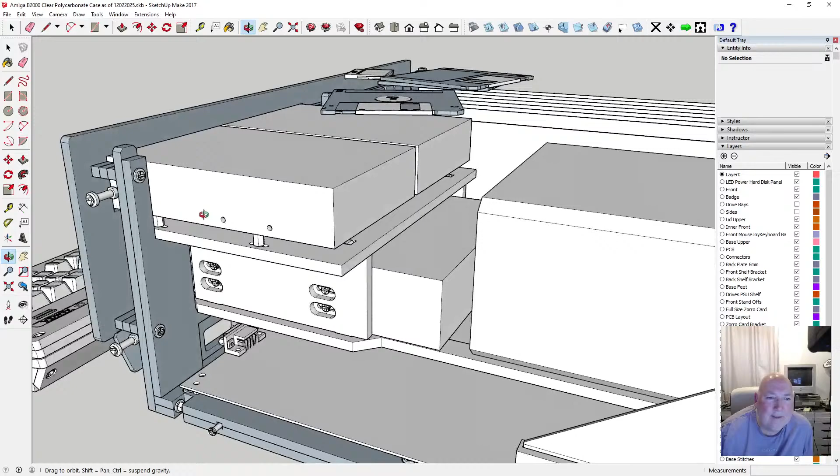The drives are in the right place, but the CD-ROM is in the wrong place. Needs to shove over this way a bit, just needs to come this way. So if we needed to do that, what do we do? It's sort of centered in position there. Hang on, what is going on here? Let's have a look.

That's 22 mil. And this is what? 27 mil. So we're 5 mil out. We're actually 5 mil out. So that's weird, isn't it? So that whole thing needs to come this way 5 mil, and then this would have to come that way 5 mil. And then you have to move these shelves over 5 mil. It can be done easy.

Right. So it begs a question on the real one - let me just measure the real one. Are they equally spaced out on the real one? Let's have a look. So you've got from there to there 30 mil, from there to there 30 mil.

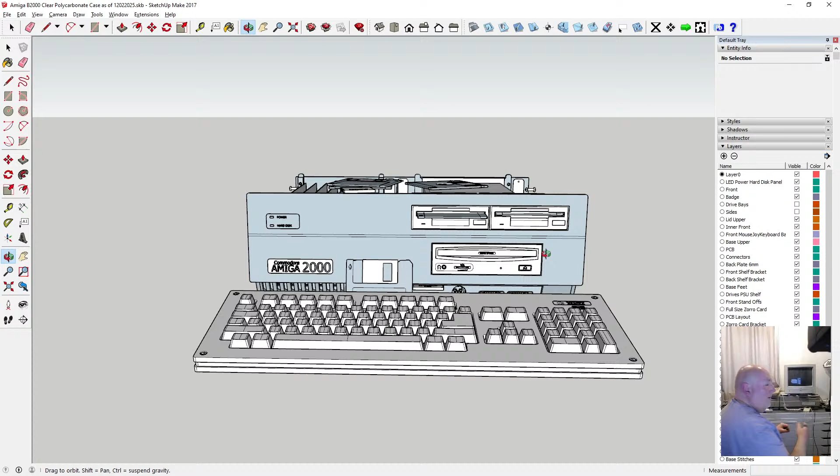So it's equally spaced out 30 mil, so it's 30 mil. It should be 30 mil from there to there. That's 27.25, and from there to there it's 32.25.

So the whole thing needs to go over, I don't know. If I was to grab - so if I grab that, for instance, grab that and move it over 5 mil. That's going to be too much this side now. 32.5 that way.

.27, so I've moved it over. So it needs to move over 2.5 mil, doesn't it? So it needs to go 2.5 mil. So we're 2.5 mil out for whatever reason. 30 mil there, 30 mil there - so that's spot on.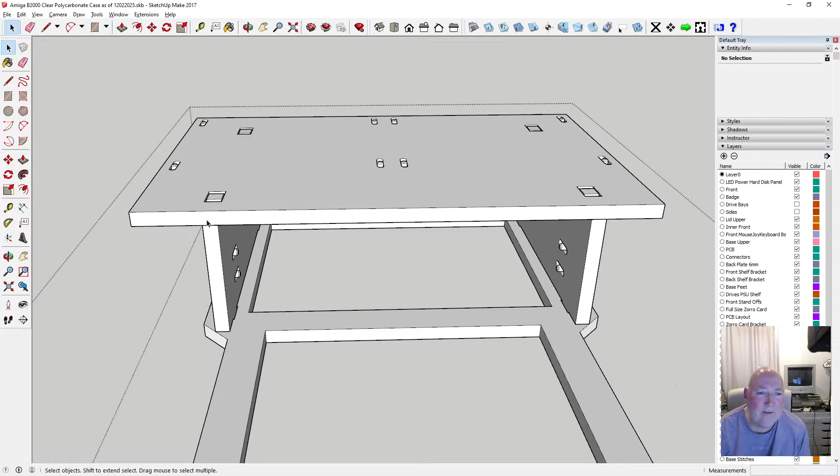So yeah, we need to go into this. Go into this and move the whole - the drives can stay where they are, but these need to move, and probably the whole thing needs to move over that much if you want to keep those the same, which they are. So we'd have to take that, and that, and move it over 2.5 mil. And go into this and move the holes over.

.5 mil, and come out, and it should have the same size here. 24.5. 24.5. The rest can stay where they are. So that's okay. Now that should be lined up with the CD.

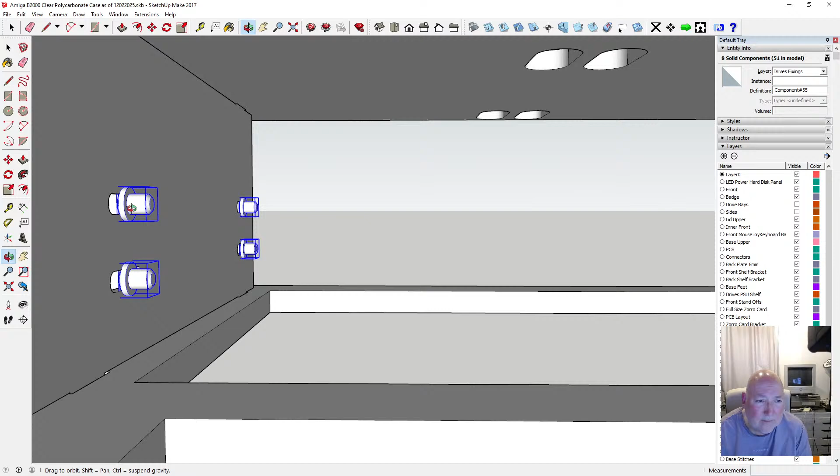Oh, the rivets are in the wrong place now. Are they? Yeah. Are they? Yes, they are. Okay, so I need to move them over. What are these things here? They're the holes? Yeah, so they need to be moved over 2.5 mil. There we go. Yeah, that's it.

Okay, so because we've moved all that over, everything else has gone with it. Now the power supply stayed where it is, so that's not right, so that needs to move over as well. So I need to get that and that, all the fixings, and move that over 2.5 mil.

Alright, for some reason it looks like it's sticking out. Oh, it does stick out, fair play. I need to, oh yeah, it does, it's supposed to stick out. Right, so I've got that there, that looks okay.

Alright, so we've moved all that. Right, so we've got that back to where it's supposed to be. Now the shelf won't be right anymore, the back shelf. So we're going to have to alter, let's alter that.

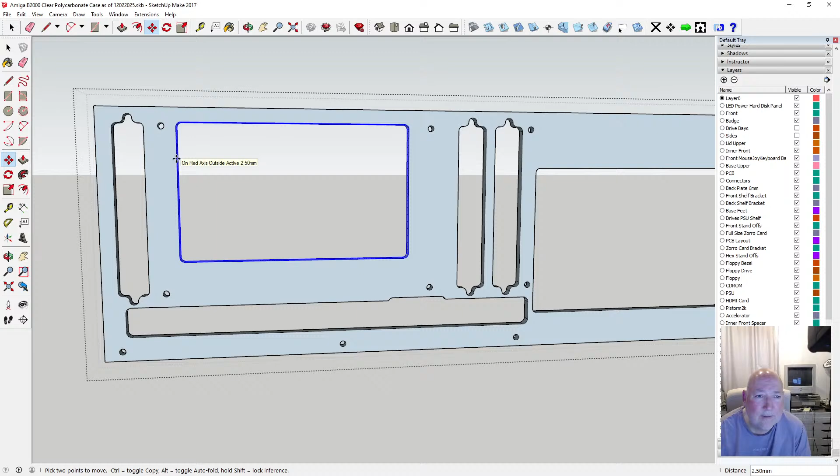Need to alter that over 2.5 mil, just like that. And we need to alter, what else? Let's remove the power supply. Where's it gone? Can't see it for looking. Can't see it. Where's it disappeared to? Drive assembly. So move the drive assembly.

Let's just save it a minute. Now going back now, we saved it. Right, so this thing is, yeah, we've got to do this inner piece. That's got to be moved as well.

2.5 mil. We haven't altered the height, so now this whole thing here, this has got to be moved over 2.5 mil with the fixings. That's it. Then we've got to move the holes, and that will have to create the G code all over again. Oh well.

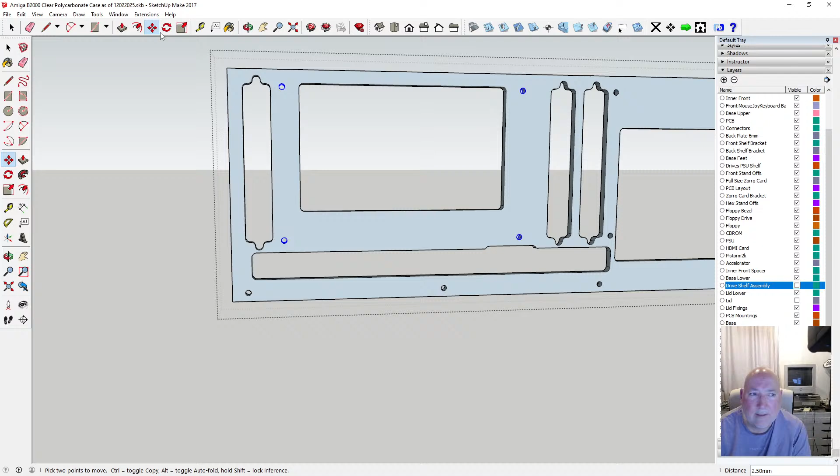.5 mil. Right, what's next? Okay, so we've got that back to where it's supposed to be. So that's it, isn't it? I think.

Nothing else. Oh, these will have to be moved. Let's just make sure the back's okay. Put the drive shelf back in.

Is it okay? It looks okay. Yeah. Are we touching anything? No. No, we're okay. It's a bit tight there now. It's okay though, just about okay. We've got a bit more clearance this side for whatever reason.

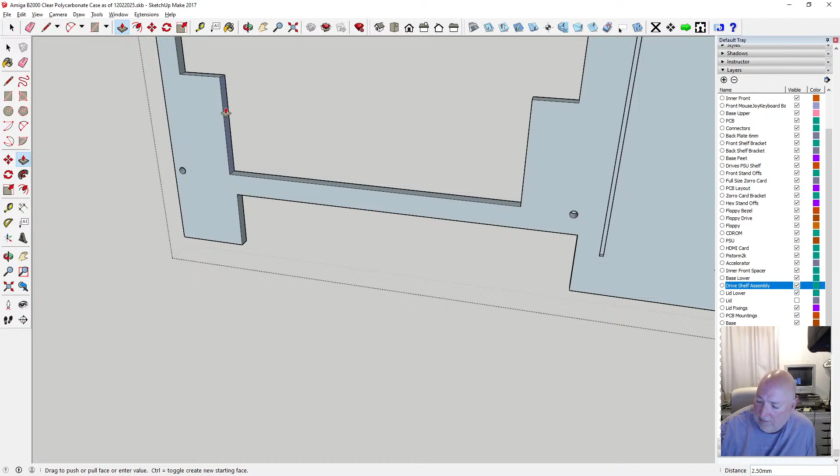Right. What's left? Now these bits are touching here now. So we need to push these over. This will be easy. That needs to go over 2.5 mil. This needs to come out 2.5 mil.

Okay, so that's good. There's another one to do, the inner bit. Same again with this one. Unless that's the one I've already done. Is that the one? Hang on. Let's make sure that's not the one I've just done.

Right, I could do just go like this. X-ray. Bloody hell, what have I got the paint bucket for? Anyway, I can't tell, there's too much going on in the drawing, so let's go back to what we had before.

So that's the one I've done. No, that's the one, the outer one. So we need the inner one. We might be able to get rid of some of this soon. 2.5 mil. Might be able to simplify this design if we're going to do stitching. Oh, I've gone the wrong way.

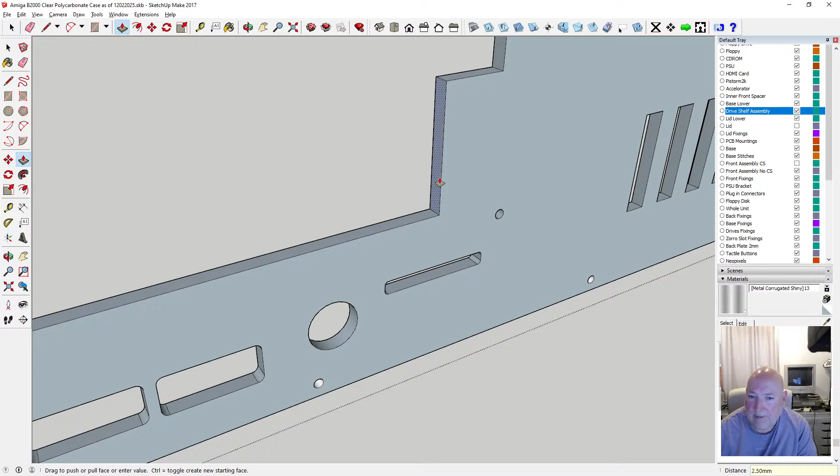Right, okay. Let's just have a look. Drive assembly off. They should be flush there, and then they should be flush over here. Yeah, they are. Okay, so if I put the CD-ROM on, drive assembly, that should all be lined up now. No.

CD-ROM hasn't moved, has it? What's going on with the CD-ROM? Oh, it's, yeah, we need to move the CD-ROM over now. That needs to go over by 2.5 mil. That's it. Okay.

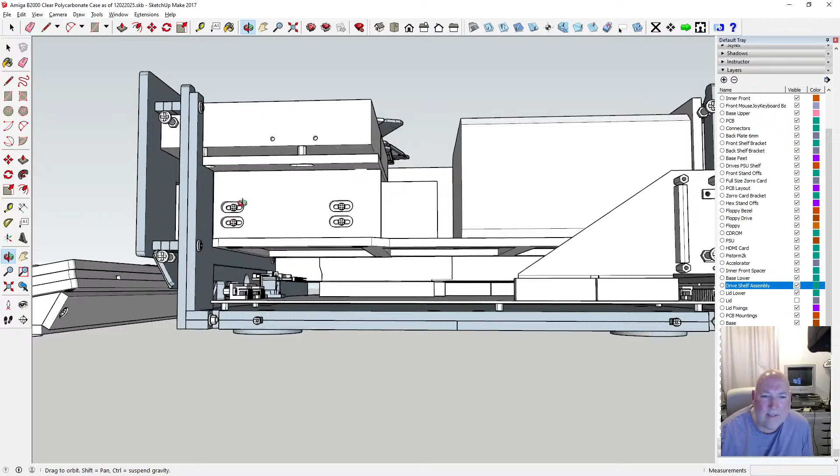So we're back again. We've corrected a problem. Now this is a little bit, this window's a bit lower than what it should be, but we'll leave it where it is. I'll leave it where it is, yeah. Okay. Right, so we're ready, we're caught up. We're ready to knock it on the head.

So, yeah, we've got a way of doing it now, stitching. Now the biggest problem is this panel. It's going to be stitched. Now, do we stitch it? We've got to stitch it down the middle. We can't stitch it long ways because we still can't make these bits. Unless we CNC that out.

But that's the bit you want to see that looks the best. Or you could always send it on to an online service and get them to make that piece for you on their proper laser machines. Just that piece, and you make all the rest, maybe. Or you've got the option for both. You need the option for both.

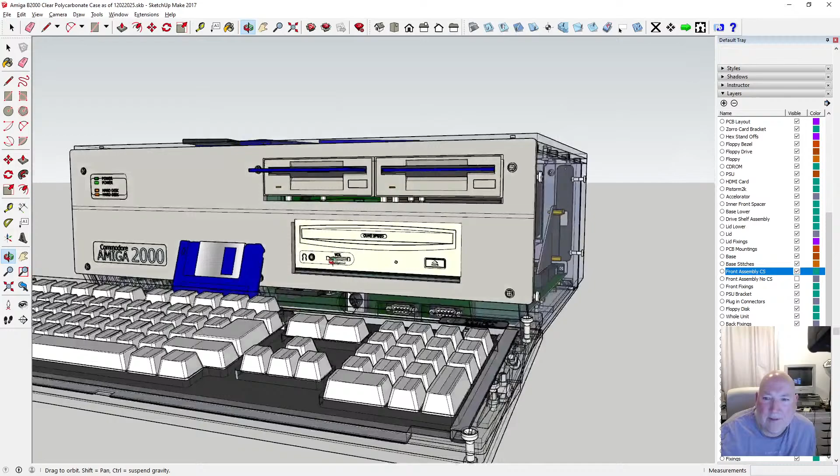So we've got two lots of acrylic front with, actually that's going to be changed now, isn't it? So if I drop that off and put this one on, all that's going to be out as well. But this one, it's been a while since I looked at this. It's out anyway for some reason. Yeah, I must have lifted the whole thing up and across. And do they line up? No, they don't even line up anyway.

So, yeah, we'll have to mod that back again. Well, we know what we've done with it anyway. It's got to match that, it's got to lift the whole thing up. We should be able to do it because we know what we've done with it. Let's try it, so go into this.

Actually, the whole thing's out by a certain amount, probably 6mm. Let's raise it up by 6mm, but it's all part of that anyway. It's got the screws with it, so let's go up 6mm and see if that cures our problem out there. Does that cure it? No.

Maybe it wasn't 6mm then, maybe it was 3mm. Was it 3mm? No. Don't know what's going on there. Oh, it's whatever this size is here, whatever that size is there. I can't see it in this mode. Whatever that size is there, 4mm. So up 4mm.

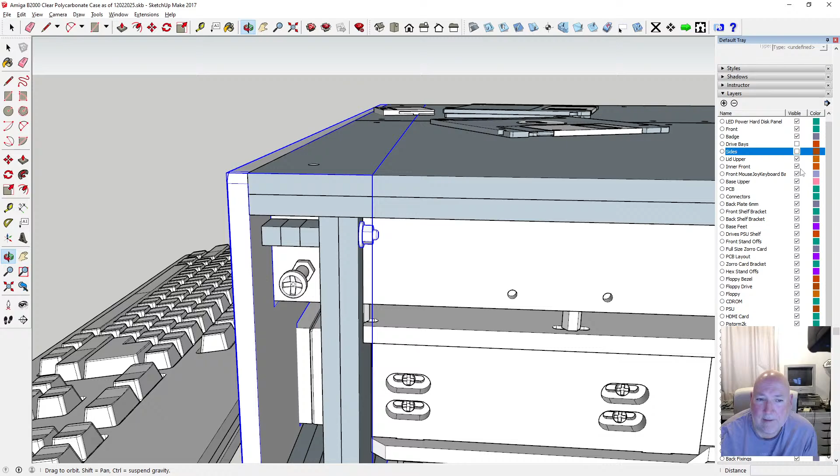Okay, so that's brought that right. Fixing holes, sides off a minute. They lined up, yeah, they seem like, hang on, 3D. Yeah, that's sort of lined up now. Okay, so we've sorted that bit out.

Now, the only thing we've got to sort out now is what we've done to this bit. So we're just going to go like that and move this whole thing up by, I can't remember how much it was. Was it 3 mil? Can't remember now. Oh, it was 2.5 mil, wasn't it? 2.5 mil, so 2.5, and that should line it all up.

Yeah, because we've got an extra piece, that's it, so that's that one. And if we turn off that one and switch on that one, they should all be right, but it's in reverse, so it doesn't matter, we don't really use that one. So to that end, we could create the split up sections in the different. So we got the option of both, we just switch on the stitched up areas.

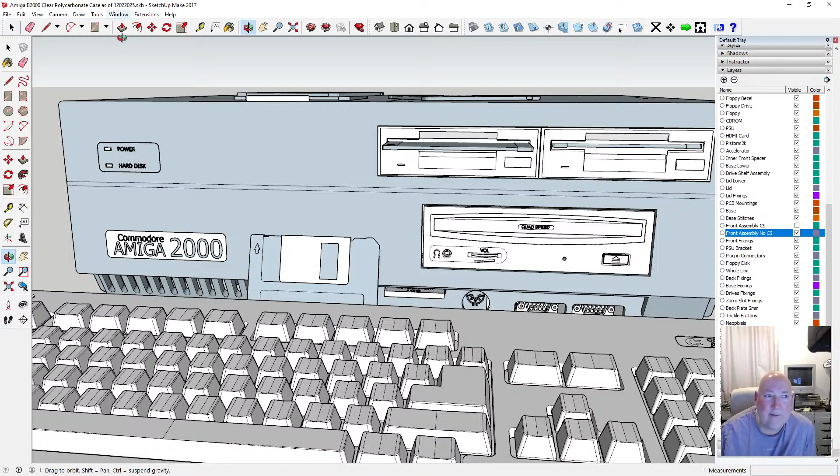So say for instance, let's get rid of the flop, let's put that mode back on. Hide the floppy disks, where are they? They're in the way, aren't they? Where are they? Where's them floppy disks gone? There.

What's this? Compact flash? Is that compact flash? No, it's on layer 0. So I'll put that with a floppy disk layer.

Floppy disks, where are you? Can't find it. It's gone. Floppy. No. Floppy disk, that's it, hide that away with the floppy disk. That's fine, right, so we've got that there.

Can hide the keyboard a minute. Right, so we'd have to stitch this. You couldn't stitch it there because that'll be too weak, so you'd have to stitch it all the way down, so you'd have to come over from here. I can go to 300, so I can go to 300 about there. So it's not all together. I think you can go to 320 if you stretch it out. So that's how much I can fit in the laser.

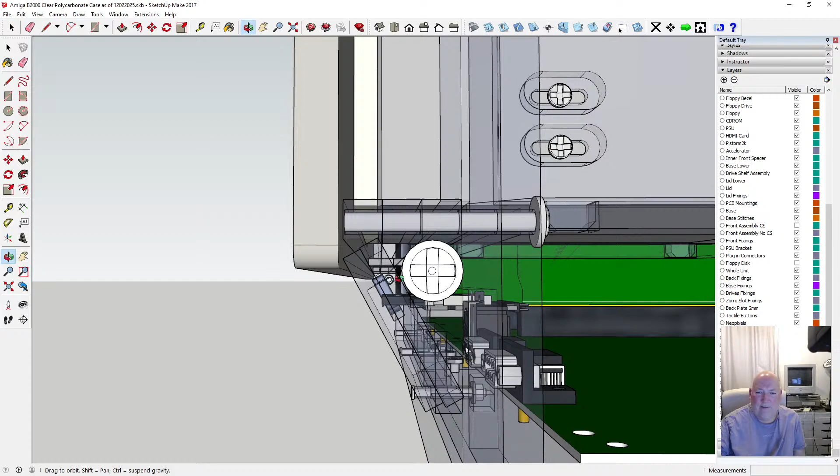Now how would you do this piece here? How would you zip that together? There's not much on it. So that's on an angle anyway, so you could probably, let's have a look what that's like inside. So that's like that, so there is a bit of space. Is there space this side? Don't know. We'll have to look at that again.